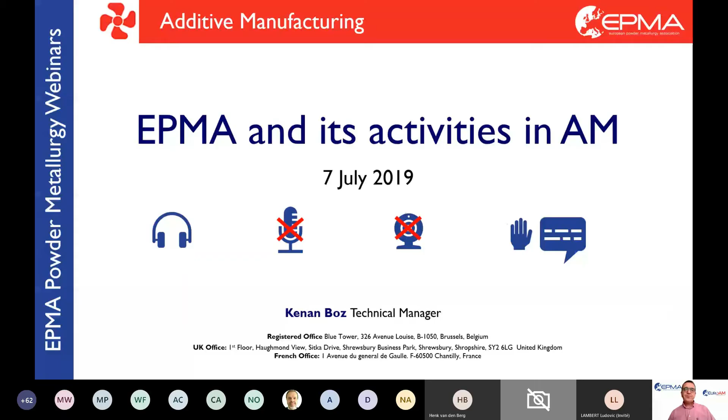Okay, so today's agenda is, as you can see on the screen, I will have a short presentation of EPMA and its activities. And then we have two speakers.

The first one is Claus Aumund-Kopp from Fraunhofer IFAM Bremen. He is the group leader of additive manufacturing in the institute, and also one of the chairs of our sectoral group of additive manufacturing, EuroAM. And then we have Walid Frika, who is the sales manager of Granutools from Belgium.

Granutools is, as you may know, a company specialized in measurements and metering in powder metallurgy.

So regarding EPMA, for the ones who have no idea what EPMA is, I will go step by step. EPMA is the European Powder Metallurgy Association. It is a non-profit association established in Brussels in 1989 with three key missions.

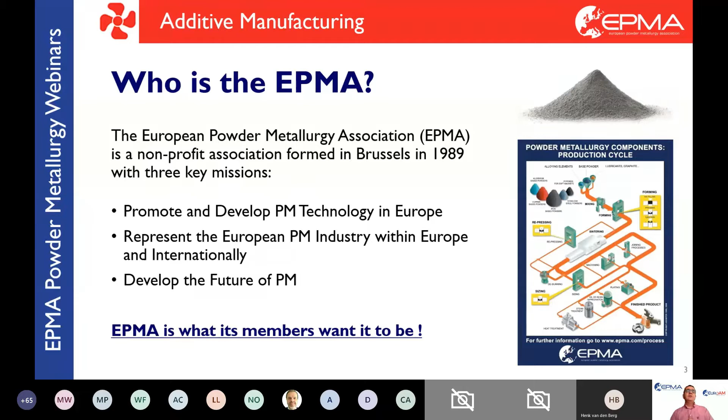The first one is promoting and developing PM technology in Europe and representing the PM industry in Europe, either internationally or around the Euro land, and developing the future of powder metallurgy. The best definition I would like to express is the one underlined below: EPMA is what its members want it to be.

Regarding the history of powder metallurgy, if we make a schematic explanation, we can consider it as a tree where the roots are our materials, that is the ferrous and non-ferrous alloys, the hard materials, tungsten carbide, together with cobalt interfaces. With all these materials, we build up our applications.

The very first and basic application of powder metallurgy is press and sinter. It is one of the main applications used in automotive steel. Then we have the second sectoral group, or application, which is hard materials, especially for cutting tools. And then we have metal injection molding. Step by step, new applications have evolved.

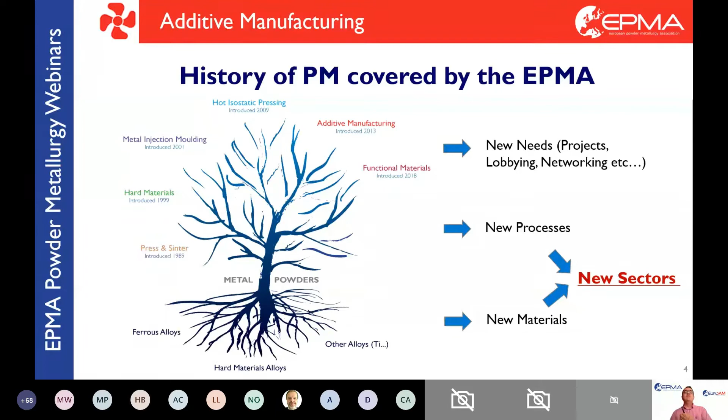EPMA has contracted new sectoral groups to represent these industries. As new needs evolve with new projects, lobbying and networking, and as new processes develop using some new materials, new sectors are born. So in the end, maybe we will have a seventh sectoral group within the next 5 or 6 years, we don't know.

Regarding the EPMA sectoral groups, as you can see, we have 6 sectoral groups. These sectoral groups have regular meetings to follow up the industry together with universities and academicians.

Also, we have the statistical service to collect data about powder metallurgy in Europe. And then we also have the benchmarking service to give an idea about the current situation and the future of the industry, together with the trend service and the benchmarking service.

And then, of course, we have the seminars, as you may already know, depending on each sectoral group, we organize seminars regularly. And we also have publications. As you can see, we have 4 booklets for additive manufacturing, hipping, MIM, and press and sinter.

We are working on the preparation of the booklets for HM and functional materials. I think by the end of the year, we will have the complete set of brochures for each of our sectoral groups.

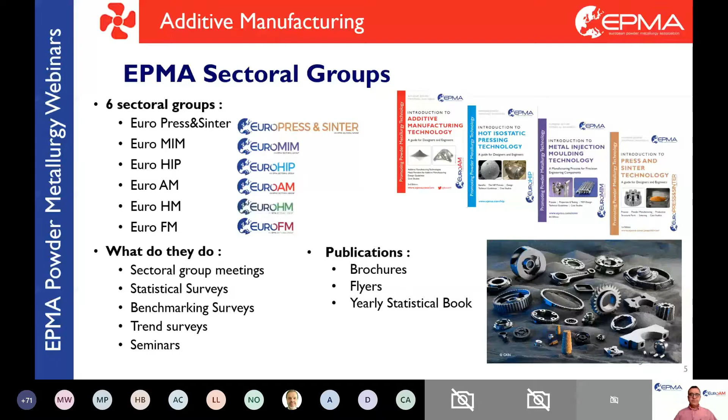So I also want to say some words about the working groups of EPMA. We have 2 main working groups: EHQS and EPMI.

EHQS is the working group of EPMA on environment, health, quality, and safety. It has three subgroups, as you can see on the screen. One is ISO and standardization. The other one is chemical management, about regulations and legislative issues. And also a subgroup on life cycle analysis.

EPMI is the European Powder Metallurgy Institute, what we call a kind of group of academicians coming together from research centers and universities, and they work on development of projects. They work on transfer of students or staff in between, and also they support EPMA with respect to education and research topics to promote powder metallurgy in the Euroland.

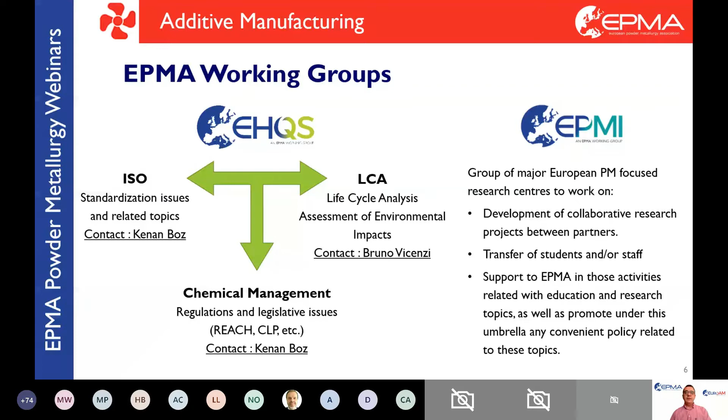For the EHQS working group, I would like to invite you to join our bi-monthly newsletter, follow up the issues related to powder metallurgy, as it looks like standardization and chemical management will be important topics for powder metallurgy within the next years.

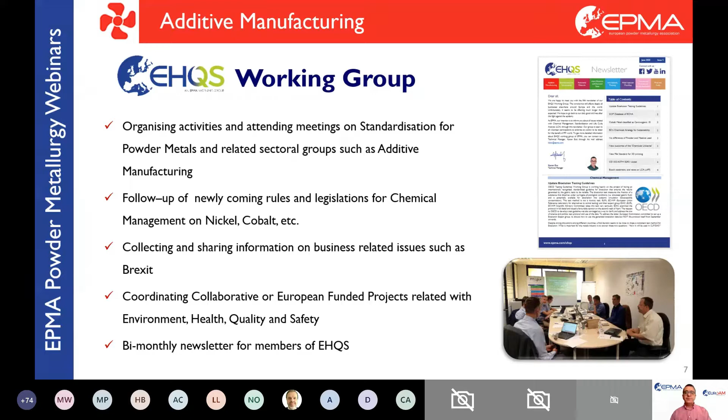So, regarding the European Additive Manufacturing Group, the EuroAM, as you have seen it on the tree, it was set up in May 2013, together with the companies and organizations in the supply chain who are members of EPMA.

It is one of the most active groups in EPMA. As EuroAM, we organize seminars regularly every year. For example, last year the seminar was in Gothenburg, Sweden. Unfortunately this year we had to postpone it to December. It was planned to be in Augsburg, Germany, together with Fraunhofer IGCV.

And also regarding the publication of our brochure on additive manufacturing, we announced the third edition of this booklet. It is one of the main handbooks of additive manufacturing. You can download it freely from our website.

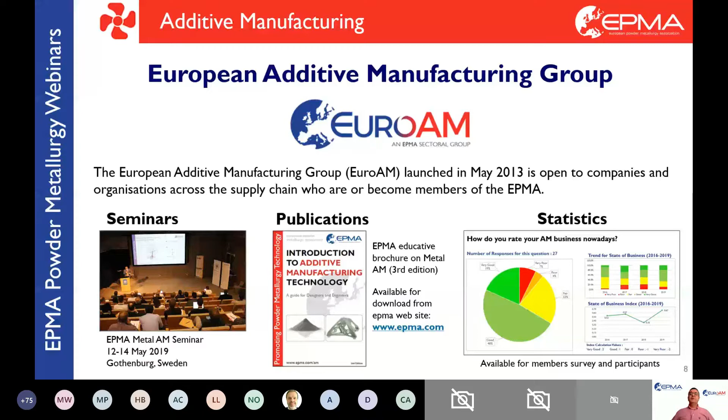And also regarding the statistics in AM, EPMA's statistics, especially the trend service, is one of the main statistics followed by the whole industry. But it is unfortunately available only to members and participants of the survey.

So I want to say some words about EPMA's club projects. The club projects are the projects coordinated by EPMA based on ideas coming from universities and R&D centers, or what we call the contractors. We announce these project ideas to the industry to find partners who will fund the project.

Up to now we have completed 28 club projects as EPMA, and we raised more than 1 million euros for these projects from the industry. Currently we have 6 projects running, and we will have 3 more projects to be started before the end of 2020.

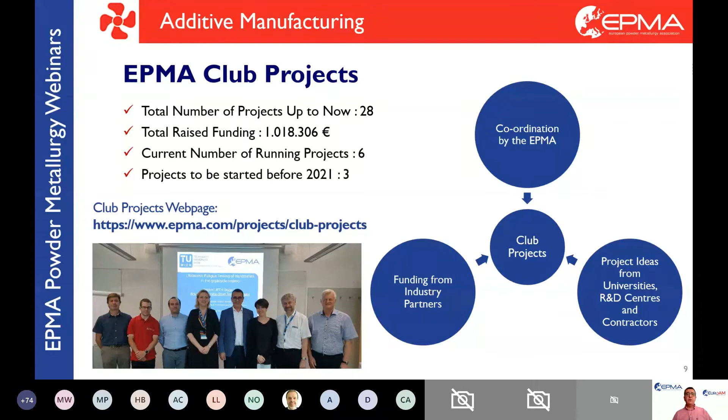The next thing I would like to mention is the EU-funded projects of EPMA. Up to now, EPMA has been participating in many different EU-funded projects, namely AM Motion, EFFIPRO, and the current running ones, especially Supreme and SAM. These are all projects within the scope of Horizon 2020 or Marie Curie training networks.

I want to say some words especially about... sorry, yeah, okay, I'm sorry.

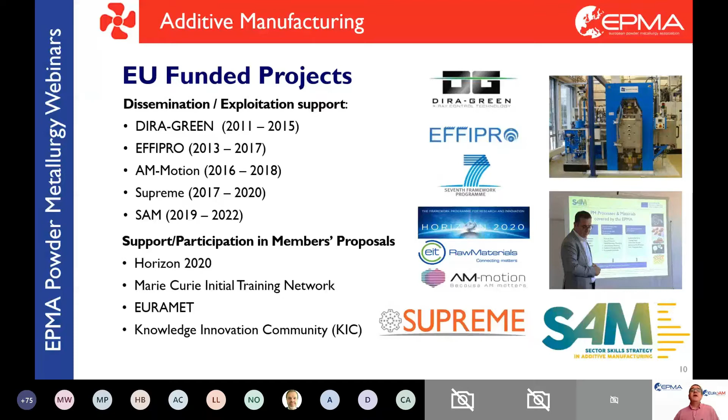Regarding the SAM projects, I want to mention our invitation to join its LinkedIn groups, especially for students, trainees, and job seekers in additive manufacturing. You're kindly invited to join SAM projects LinkedIn groups so you can make good use of networking within the European additive manufacturing industry.

The most important thing I would like to mention is the European Congress 2020. It will be held online this year due to COVID-19, for the first time in the history of EPMA. It will be a 3-day event with more than 150 presentations, so it will be a very tight program.

The technical program will include presentations on technical sessions, special interest seminars, and we will also have a plenary session where our president and our executive director will make good presentations on the industry itself, on powder metallurgy, and other issues. You can follow the event or register from the website europm2020.com.

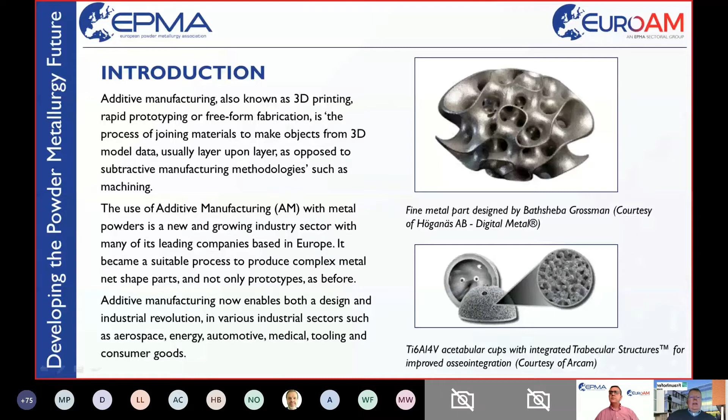AM has definitely special benefits. I already mentioned this increased freedom of design. You can build very lightweight structures like displayed here on the right. You can add additional functionality to your products like internal channels, which can hardly be cast or drilled into your products. You have less raw material consumption, sometimes up to 25 times less versus machining, if you mill away let's say 90% or even more of an aluminium block. This is not the case with AM.

You only use the material where you need it for your product itself or for certain support structures. You do not need tooling. You directly print from the 3D model. And in most cases, you have very short production cycle times and can even produce complex parts in a few days, and in many cases, much faster than with conventional machining.

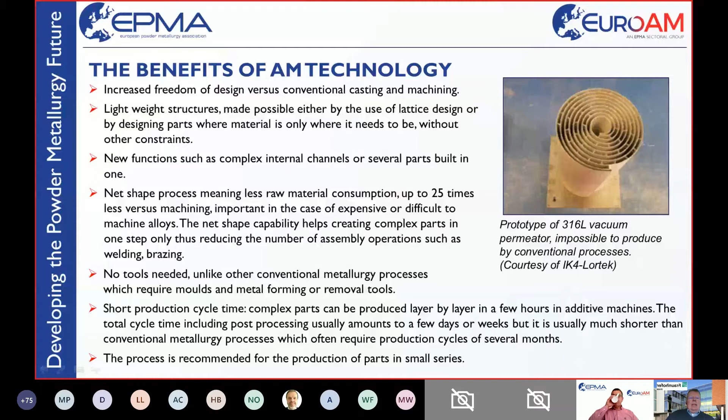Of course, as with every technology, there are limits, also with AM. One of the limits is the part size. At the moment, we are ending with a machine size of about 800 by 500 by 400 millimeters, which is one of the very big laser melting machines. A binder jetting machine of the same size is announced, but having such a machine does not always mean you can print these big parts. So you are definitely limited in part size.

Part design is also limited to some extent. If you think of support structures you need, especially with laser-based processes where you build on platforms, you have overhangs with some products which have to be supported, and things like these.

Concerning the size of production series, additive manufacturing is still seen as being limited to, let's say, lot sizes of here it says 25,000. We have seen products which are produced to 100,000 a year, but compared to mass production, AM is still limited to smaller lot sizes due to its flexibility. It doesn't make sense to produce mass products like screws or things like these.

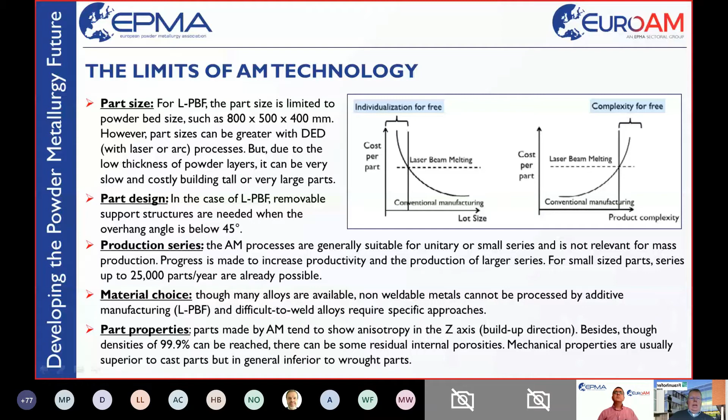So having an overview on the different processes mentioned before: powder bed fusion technologies like the laser bed or laser-based LPBF, which is laser powder bed fusion. This is also possible with an electron beam as an energy source - then it's electron beam powder bed fusion. And relatively new, having come back from 20 years ago, is the binder jetting approach, where a liquid binder is printed into the powder bed. Details will follow. And on the second branch, we are looking at the directed energy deposition, DED, processes, where we have energy sources like lasers, EBs, and arcs, and feedstocks like wire or powder. So this can be a general overview over the different processes.

Looking at the powder bed fusion systems, the most widespread processes are the laser beam powder bed fusion and electron beam powder bed fusion, which work more or less the same way. A powder layer is applied on a building platform, and then the laser or electron beam selectively melts the upper layer of the powder. This is also standardized in the according standard, where it's called an additive manufacturing process in which thermal energy selectively fuses regions of a powder bed. These melting processes are repeated layer by layer, and in this way, in most cases by lowering the platform, the 3D product is built up in the building chamber.

Going into a bit more detail concerning this process, a typical AM machine based on a laser as an energy source has a stationary laser gun, and the laser beam is then controlled by moving a mirror. So the whole surface of the building chamber or of the building platform is scanned by this laser beam, to the position where later on product volume shall come into existence.

The first machines had only one laser. Meanwhile, we have machines with double lasers and even with 4 lasers integrated into the system, simply to be able to scan larger building platforms and to speed up the production time.

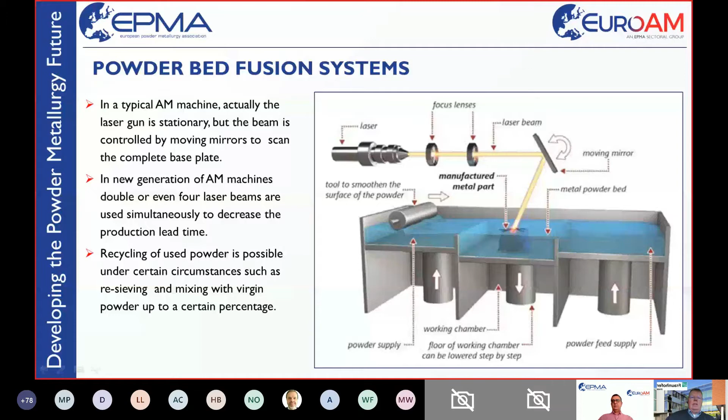Recycling, a very important aspect, is possible. Recycling of the used powder, not of the one being built into the product, but of the powder which is still surrounding the completed product in the end. This powder can be sieved and re-sieved, and in some cases mixed with virgin powder, and thus it can be reused for the next build job, at least to a certain percentage.

Another detail of the laser melting process: you see the beam scanning in this direction and melting the loose powder, and here it still says laser sintering. This is not the correct term, as it is not a sintering process, it's a melting process. By moving on in this direction, the beam melts the powder, and in the end you have a completed product. And the physics behind this is partly absorption, partly reflection, partly scattering.

So a very complex process in detail, but it's state of the art today. And we have laser powers between 200 watts and 1,000 watts, meanwhile being able to melt the metal powder and build up complete metallic products.

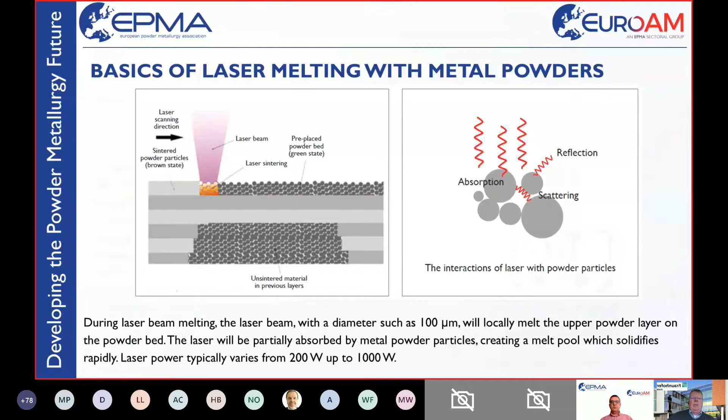Electron beam melting is a bit different. It takes place under vacuum. That's the first big difference, and it has an electron beam instead of a laser beam as an energy source. The laser process takes place under protective gas, mostly nitrogen or argon, depending on the material used. As said, EBM does the same in vacuum. It's necessary for the electron beam to be scannable in the end.

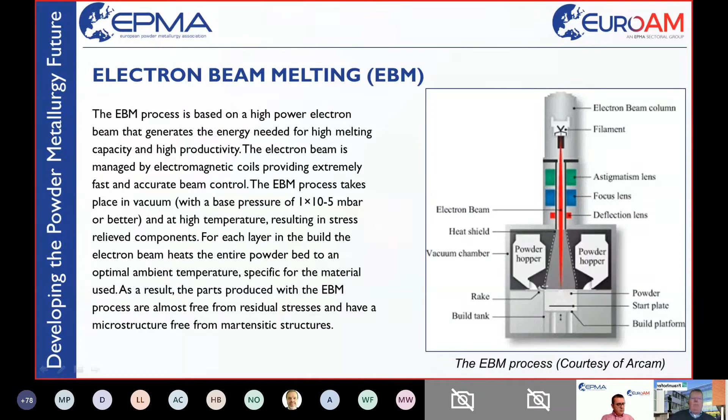Another special thing with EBM is that every powder layer is preheated before it's melted, and this preheating results in a hot process compared to laser melting. The big advantage of EBM, therefore, is that we have very, very low or almost freedom from residual stresses. Therefore, EBM is used for very special materials in the end, and has found its way into the market next to the laser beam variant of more or less the same powder bed based process.

A newcomer, or a revival, a renaissance, is allocated to the metal binder jetting plus sintering process, which has seen a renaissance from the late 1990s, where this technology had already come up, but nobody was interested in it due to the lack of the overall additive hype. Now it's back for some years already, and the metal binder jetting process is something completely different compared to the beam-based technologies.

There we do not have a beam melting powder, we simply have a printer printing a kind of binder. Here it's a liquid bonding agent in the standard, and this liquid bonding agent is selectively deposited to join powder materials. So no metal powder melted together, but in a first step bonded together.

It's also a powder bed based process. So you're preparing a powder layer, the print head comes and prints binder into the powder bed. Then you have a small drying of the binder in between, and then you repeat these steps. So powder layer, printing binder, drying, and then you end up with so-called green parts.

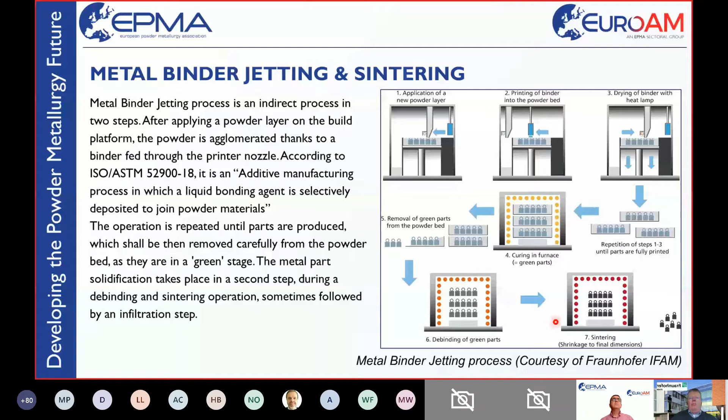Binder jetting is—sorry, Kenan, can you just tell me if I'm still—yes, we hear you, and the presentation on the screen, as far as I see. Yes, you can go on. Okay, that's fine, because I lost—yes, there was a small audio connection issue. A little cut on your voice, but now it's back. It's fine, you can go on. Okay, thank you.

So some facts about metal binder jetting plus the subsequent sintering step.

Metal binder jetting is assumed to be much faster than the powder bed fusion processes mentioned before. Costs are assumed to be lower. We do not have reliable figures yet, but we are on a way to establish binder jetting as one of the metal powder-based processes into industry.

And one of the biggest advantages of metal binder jetting compared to EBM and LBM, or powder bed fusion processes, is that you do not need supports, at least not during the printing step.

And the build box can be completely filled. And if you look at build box sizes of this size, 800 by 500 by 400 millimeters, you have much more volume during one print job to be filled.

That's at least assumed. Of course, you need two process steps, printing plus debinding and sintering, but for the powder bed fusion processes, mostly also thermal treatment is necessary after printing. You have green parts to be handled in the end. These green parts are brittle, so green part handling in between the two process steps is still a challenge to some extent.

You are a bit limited concerning the wall thicknesses. So if you want very thin walls, the beam-based technology, especially laser beam melting, might be a bit more advantageous compared to binder jetting.

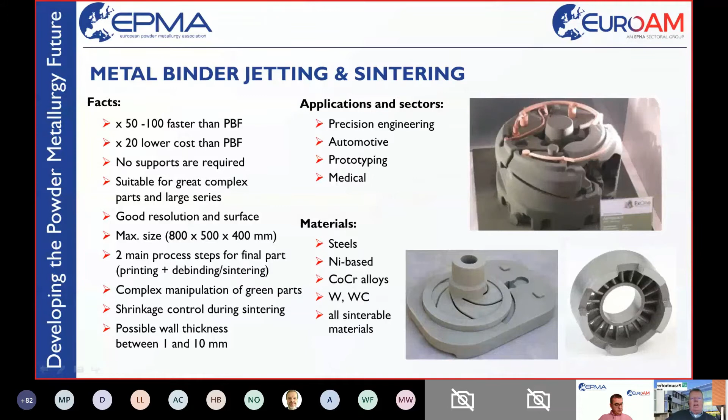Concerning the materials for binder jetting, we have all materials which can be sintered in the end. One exception today might be aluminum, which is still missing here for binder jetting, as sintering of aluminum is a very special thing and a science on its own. Only a very few companies are able to do that. So aluminum for binder jetting is not state of the art today.

Coming to the third process group, which is directed energy deposition. Some people say this is not a real AM process as it's not layer by layer, if you see it very strictly, but DED is part of the market, definitely, and powder is used for the process.

So you have a powder feed and a laser melting the powder, and then you have a welding process, a clear welding process. And if you use a 3 or 5 axis manipulating system, you can end up with very large and very complex structures.

A limit with DED is the production of very small, very fine lattice structures or internal channels. There, DED is definitely limited compared to the other processes mentioned before.

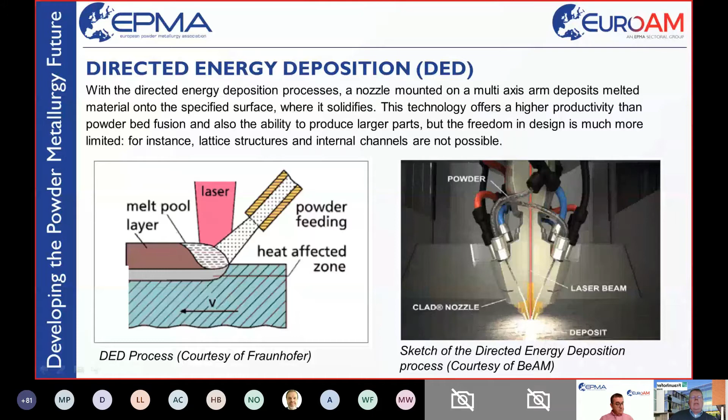If you look at the main process steps in AM, you have all the same with the different processes. You start with the 3D modeling. You take a 3D model, or a 3D scan, so a reverse engineered model, which is then transferred into the so-called stereolithography data, which has become the standard data for additive manufacturing. So STL data is triangulated surface data.

This data of the model is then prepared, so pre-processing for the printing step itself. Holes can be repaired, the surfaces can be turned, the part orientation is defined, so the positioning in the build chamber is defined, and then this model data is sliced, so cut into slices, so it can be printed layer by layer for most processes.

This data preparation step, meanwhile, is supported by lots of different software solutions, very sophisticated software supports. Support is the right keyword. This software, to some extent, allows an automated positioning of support structures for the beam-based processes, for example.

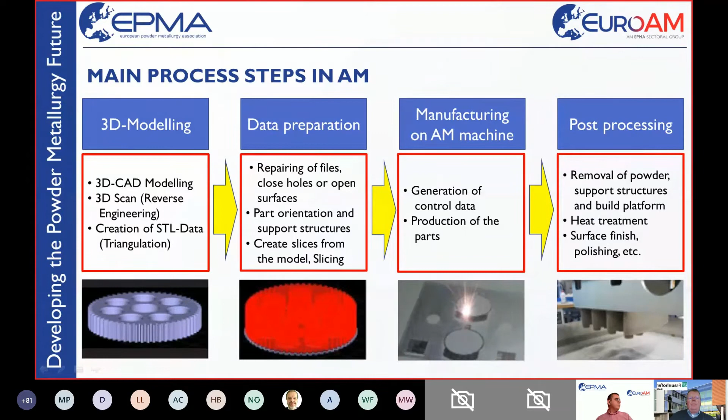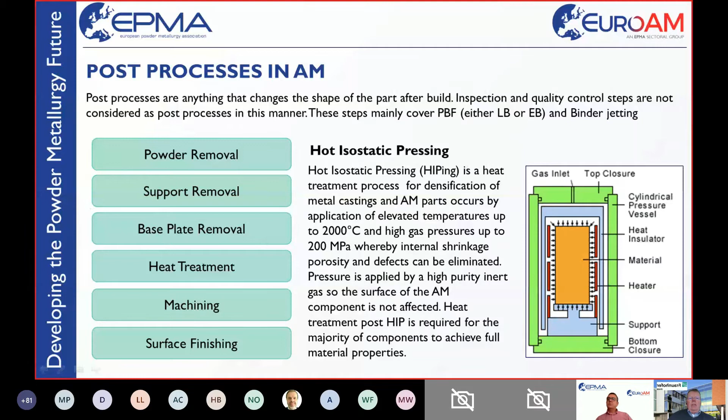Again, post-processing: powder removal, support, base plate, heat treatment, machining, surface, as said before. One special thing is hipping, which means hot isostatic pressing, which is still done with a lot of 3D printed products. As I mentioned at the very start of this presentation, we have in many processes a certain amount of statistically distributed closed porosity, and with closed porosity, hipping would be the right post-processing step to get rid of that. Open porosity at the surface can't be solved with hipping, of course, but hipping is used by very many manufacturers, therefore it's mentioned here.

Okay, one big topic concerning additive is always the keyword topology optimization. Topology optimization, well known by many of you, I think. There you have software which allocates material only where it's really necessary for the purpose of the part, mechanical loads or other things the part shall fulfill.

And these complex structures can be printed with most of the 3D printing processes. So topology optimization has become more reliable, or has become more common with 3D printing. So 3D printing has become a real enabler of topology optimized parts.

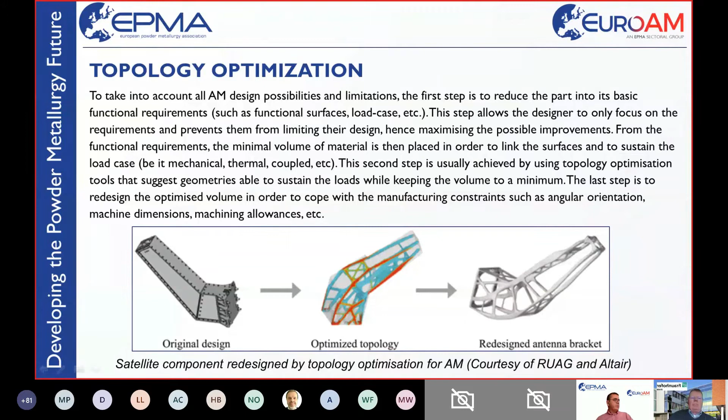Standardization in AM is one big challenge still. AM in general is a relatively new technology compared to, let's say, casting, which humans do for more than 5 or even 10,000 years now. So standards in AM are still needed.

A lot of standards are still needed, and standardization is a hard business, time consuming. Nobody pays for it, but a lot of colleagues are involved in standardization, even in AM. In the US, it's the F42 technical committee who does standardization for more than 10 years now, especially for AM. And meanwhile, we have an ISO committee, which is the TC 261.

So there is a lot of work ongoing, and it's not only ISO and ASTM. A lot of national standardization activities are ongoing. In Germany, I can talk for the VDI, the Association of German Engineers, who's come up with a lot of guidelines, which perhaps later on are transferred into standards and even international standards.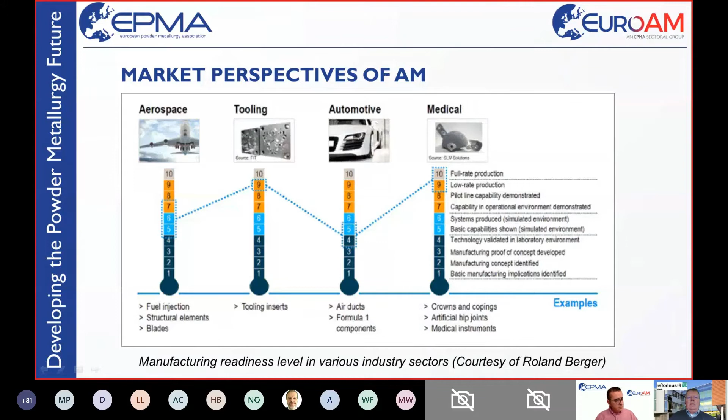And it's up to you and your companies to find the right products for 3D printing processes and applications, or use or take old products and integrate new functionalities. And this is the key word.

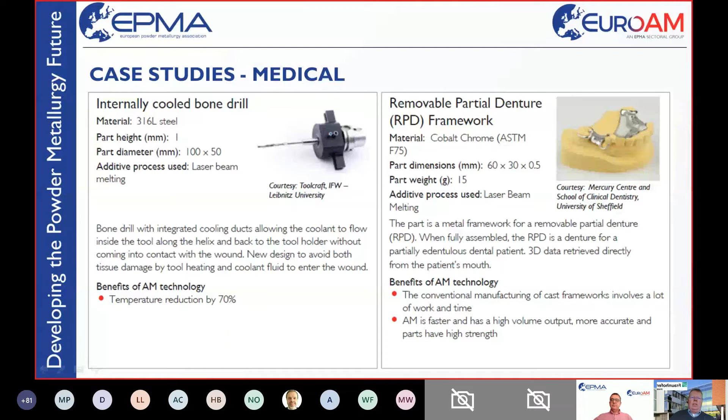Last but not least, we have this. We have a lot of case studies also in our brochure. Just some examples over here. So you can realize and design internally cooled bone drills, or drills in general. So internal channels is a big topic. You can use AM for processes which have been casting processes with a lot of process steps, and here the material was cobalt chrome. So dental industry has taken a deep insight into additive manufacturing, and many dental parts are 3D printed meanwhile.

We have things like complex tools with internal lattice structures, with internal cooling channels, very sophisticated designs where 20 parts have been converted into one printed part, for example. Brackets like these are topology optimized things. We've spoken about that.

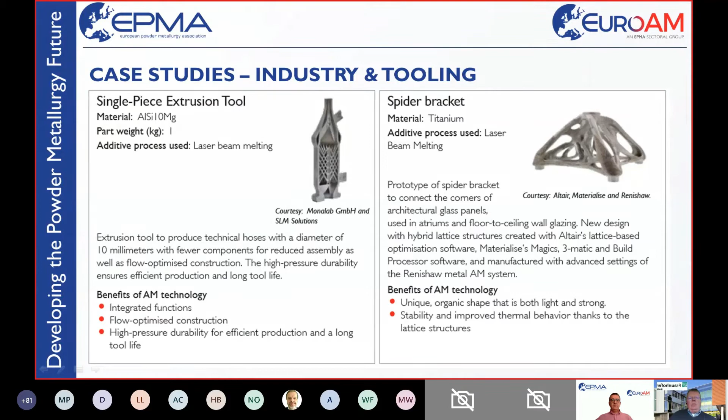So this was a fast and very basic overview on what AM is capable of. We have a lot of new possibility with these processes, and it's up to you to find the right product and to improve these processes. Thank you very much for your attention.

Kenan, it's up to you to introduce the next speaker. Thank you. Thank you very much, Klaus. This was really a nice and compact presentation to describe everything to beginners in AM, let's say. And that was our goal, actually, in this webinar.

Now, we will go somehow in depth with some technical details in our next presentation, where Walid will make a nice presentation about powder metallurgy, measurement tricks and issues like that in additive manufacturing.

So, Walid, are you online? Can you hear me? Yes, I am. Can you hear me too? Yes, I can hear you. Maybe you can share your screen.

Oh, yes. Now, as I said, Walid is from GranuTools. GranuTools is a company based in Belgium, mainly activities in measurement of powder flow and other details. Now the floor is yours, Walid. Have your presentation, and after then, I'm sure you will have a lot of questions depending on your presentation. Okay, thank you. Thank you for the introduction.

So, yeah, this presentation will focus mostly on powder characterization for additive manufacturing. And as said during the introduction, one of the challenges of additive manufacturing is the layers. So the goal is to understand how the powder will spread into layers.

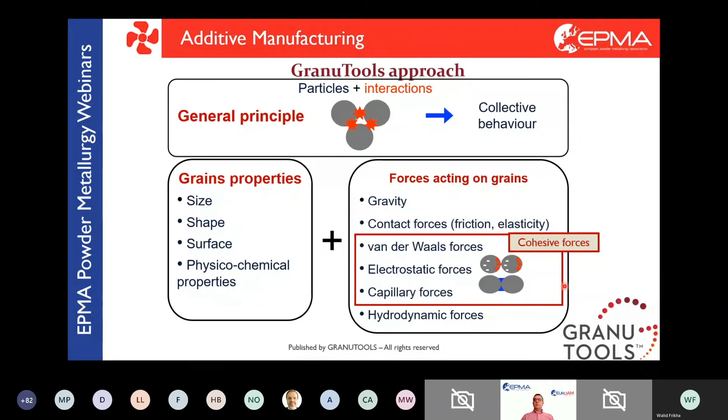The thing is, during the introduction, we told you that I work for GranuTools, which is an equipment manufacturer that produces several equipment, and the question I always get is, why do you have so many equipment to characterize the cohesive forces? This is the second principle about powder characterization.

The measurement device works as a proxy for the process condition. When you want to characterize a powder for a process, you need to understand what the process conditions are. Specifically, you need to understand the stress state, shown here on the y-axis, and the flow fields on the x-axis.

If I want to understand the powder behavior inside an industrial silo, I need to characterize the cohesive forces. But in the silo, we have very high stress states and very low flow fields. This means the powder is under a huge amount of stress and it's barely moving. So you need an instrument that will reproduce those process conditions, like a shear cell, for example, when you need to put pressure on the powder and move it very, very slowly.

Now, what we will focus on today is spreadability, and the spreadability is done with a 3D printer recoater. In the case of a 3D printer recoater, you need high flow fields because the goal is to recoat as fast as possible. The faster you recoat, the faster the piece will be printed, and to have almost no stress state, because the powder is at atmospheric pressure or even lower depending on the process. So the goal is to find an instrument that will mimic those process conditions.

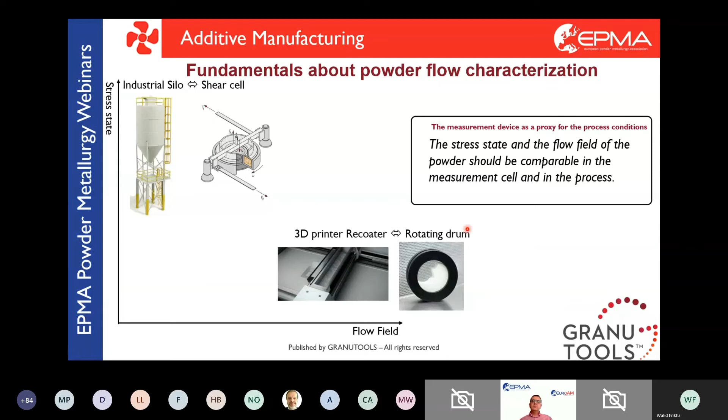And in our instrument at GranuTools, we are using the GranuDrum, a rotating drum principle to do this kind of measurement. So I will just spend a few minutes explaining what we are actually measuring with the rotating drum principle.

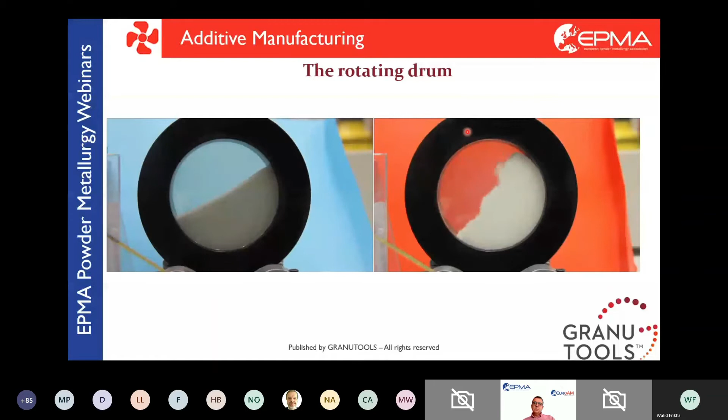We take a picture of the blue video every second for 30 seconds, so we have 30 pictures, and we compare those 30 pictures to each other. Then we do the same with the red video and see what is the deviation of the average angle. So I will just give you the final result directly.

So we can measure a cohesive index at each speed. I can tell you that for this powder, which is flour, the cohesive index at 2 RPM is 42.8. This is my value, and from experience, I can tell you 42.8 is not good. If you want to use a powder in an additive manufacturing process, you need to be between 10 and 20, depending on the geometry of your machine and your recoater. But yeah, between 10 and 20 is a good value.

Glass beads are under 10. Maize starch is above 80. So we have, let's say, a table of values depending on the material.

What we can see is that the cohesive index is a function of the rotating speed. If you measure the cohesive index at 2 RPM or at 20 RPM, you are not getting the same value, which is logical because the goal of the characterization is to comply with the process condition. Depending on the speed of your recoater, you will not gain the same spreadability. Depending on the speed of the rotating drum, you will not get the same cohesive index. This is very reassuring because we can tune the speed of the rotating drum to match the recoater speed and have a very close proxy to the process.

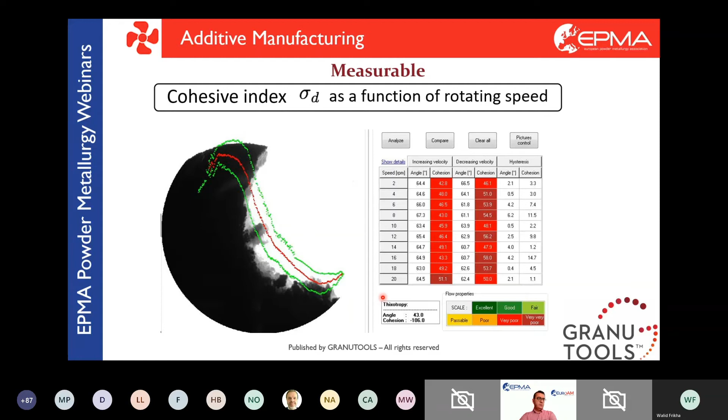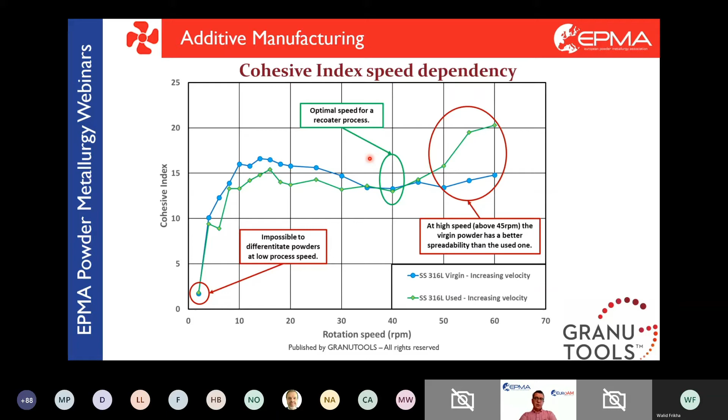So if you want to spread virgin powder and used powder seamlessly, you should work at a speed of about 40 RPM. For this, in GranuTools, we have a table that connects the recoater speed and the rotating speed, so you can find the approximate speed you should choose for this process, at least for this powder. This is how we do the measurement.

Now I will explain a little bit more with examples and more data, let's say scientific data.

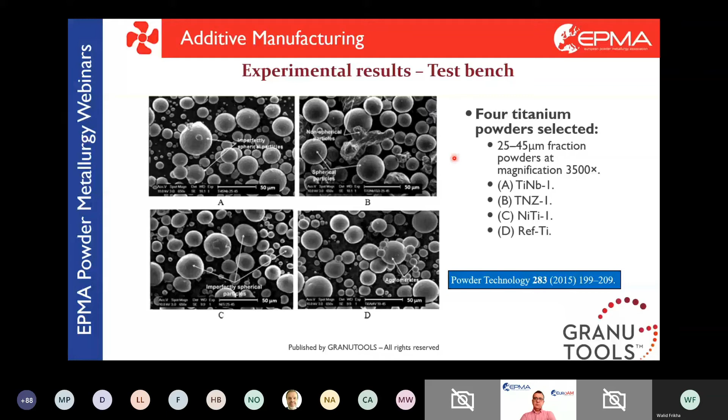So now I will focus on the rotating drum principle. I explained that the rotating drum can help us measure the cohesive index, which is measured with the temporal fluctuation of the powder interface, and that this will depend on the speed. So we chose 4 titanium powders used in the medical industry, used to print implants for people who break their skull or bones. We wanted to characterize the cohesive index on those powders.

This means every time you want to print a powder - I mean, here it's not a printer, it's a test bench - but every time you want to put a powder inside the test bench and know in advance if the powder layer will be homogeneous or will have irregularities, you can just use the GranuDrum. If the cohesive index is below 24, it will spread evenly. If it's above 24, you may have waves or minor irregularities. So this is what we call the pass-fail test. This is used for quality control. You can characterize your powder to understand what the homogeneous powder layer will be.

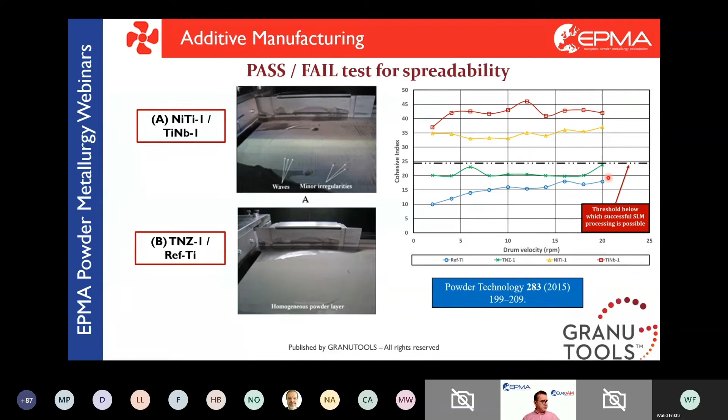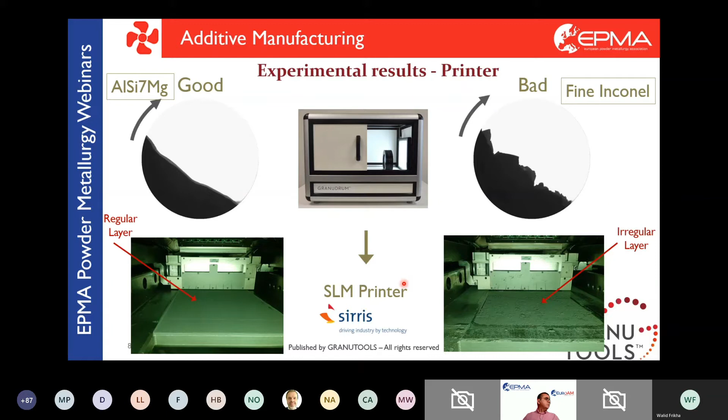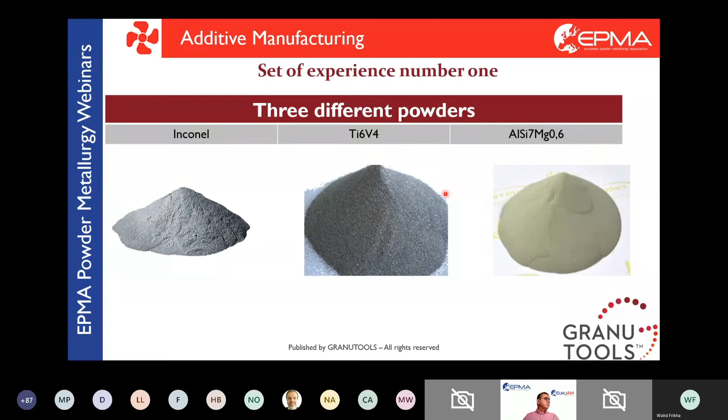So what we want is to improve this naked-eye system and create a way to assess the powder with a machine, and to compare the cohesive index and the powder bed irregularities with a machine. So we started a new set of experiments with 3 powders: I'm not sure it's an inconel, I think it's a scalmalloy, a titanium powder, and an aluminum alloy - so 3 different powders.

And what we do is, inside the printer, we take pictures from the top. We can see that at 30 millimeters per second, we have a quite regular powder layer. At 80 millimeters per second, we start to have small waves. And at 160 millimeters per second, we have irregularities and big waves.

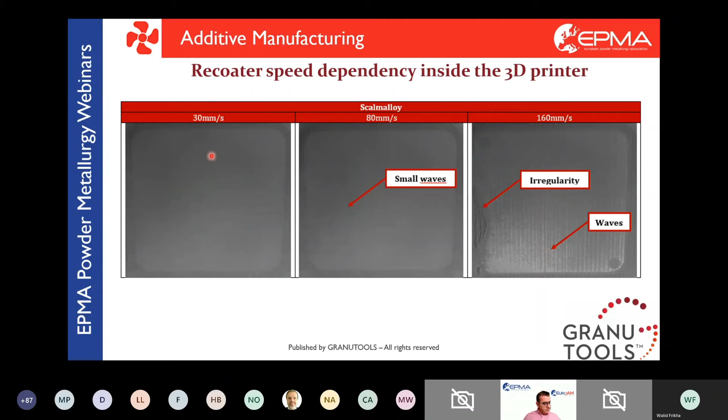So we put those 3 pictures inside a software that we call the granulator, which gives us the interface fluctuation of the powder. Do not pay attention to the layer numbers, it's not an important parameter. But what we can see is the interface fluctuation of the powder bed. For the scalmalloy, it's low at 30 millimeters per second, a bit higher at 80, and then it goes way higher at 160 millimeters per second. And what we get from that is a scientific sorting.

From that experiment, I can tell you that the titanium powder is the best one, followed by the aluminum alloy, followed by the scalmalloy. I can sort those powders and discard the powder very easily. So this was the goal.

But this interface fluctuation system is very complicated because you need to fill the printer with powder, recoat the powder, take a picture, and then measure the interface fluctuation. So the question is, if we do the test inside the rotating drum, which takes less than 15 minutes and only requires 50 milliliters of powder, will I get the same sorting?

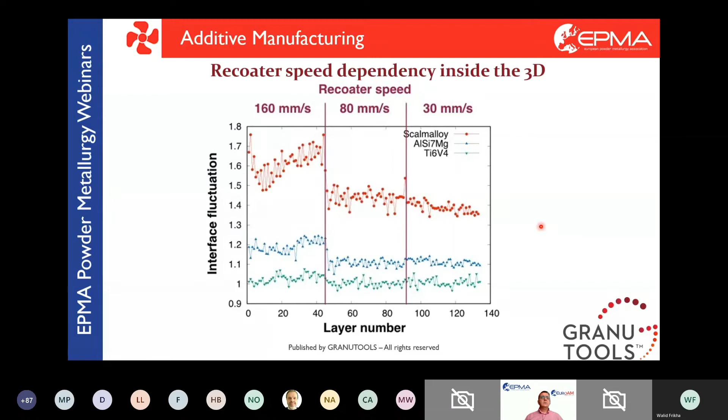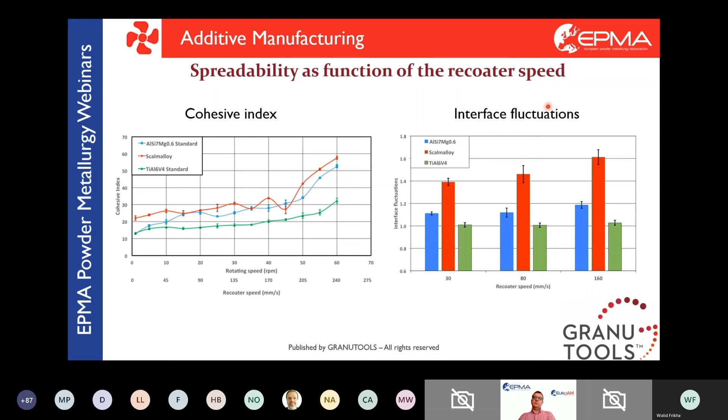So we wanted to understand: is characterizing the powder good enough, or should we also characterize the recoater? Does the recoater have a big influence on the powder characterization and on spreadability characterization more in general?

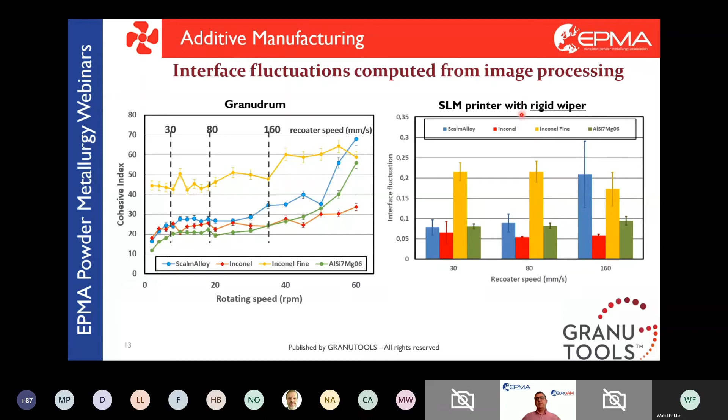So the question is, does the wiper have a big influence on spreadability? We know the powder has a big influence on spreadability, so we know we must characterize powder in order to predict spreadability. What about the wiper?

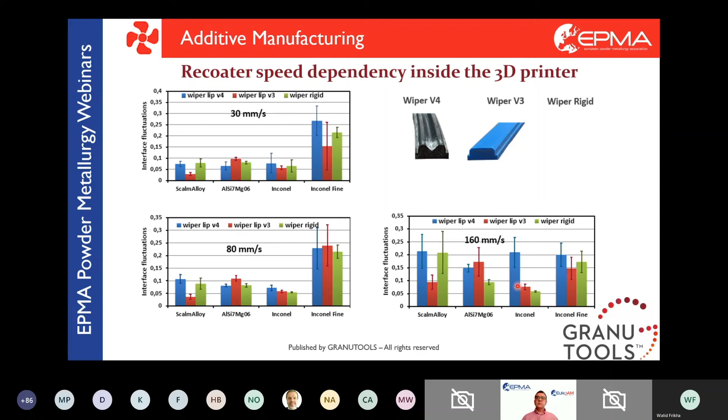So we turned to one of our partners that may have a solution for us, which is DCS Computing, that uses a code named Liggghts. So Liggghts is a simulation software for granular material.

And what we did is, since the geometry of the drum, the GranuDrum, is so simple, we can do a simulation of the powder inside the software. And what is good is that we can still follow the process condition, because we can take several pictures at 20 RPM, 60 RPM, and then do the same simulation inside the software, and set up some parameters for the model that will match the interface the best at the speed we want to work at.

Because, for example, if you want to calibrate your model with angle of repose, then you do a heap, you get the angle of repose, let's say 47. You set the parameters for your model, you get 47 as well, and that's it.

Your model is calibrated. But you can find several sets of parameters that will match this one angle of repose. When it comes to the test with the GranuDrum, since the goal is to match the interface as best as you can, there is only one set of parameters that will give you a perfect match, and this perfect match may be perfect at 20 RPM, but not at 60 RPM.

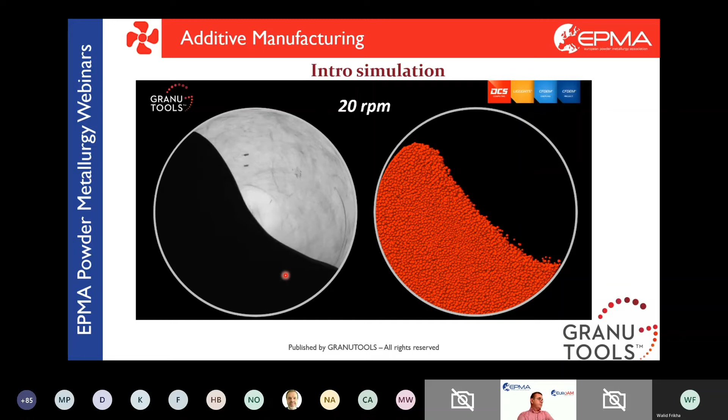And since the drum is a proxy to the recoating process, with the same process conditions, if you want to do a simulation on spreadability, you can, and you will get very good results. So this is what we did here.

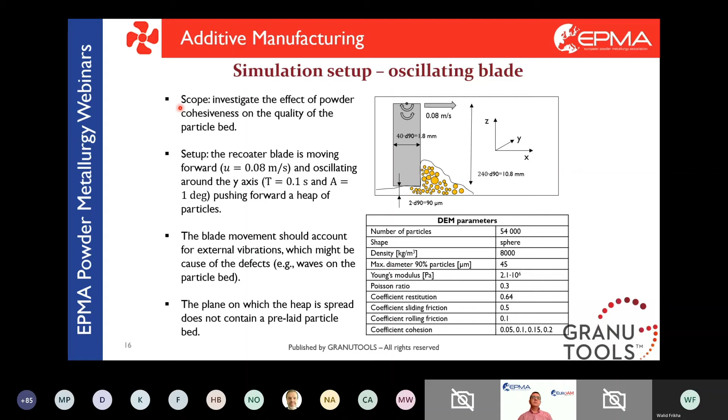So this is not a webinar about simulation, so I will not spend too much time on this slide. Here you have all the DEM parameters that we chose for the simulation. You have all the setup that we decided to put, and then we run the simulation, and we can see that we can assess spreadability with a simulation.

So this is how we can, with the GranuDrum, calibrate a model, and then use this model for simulation. And in the simulation, you can test all the shapes of recoater that you want, because it's only one shape to change. Then you run the simulation again, and you have your data, and you know what will spread well and what will not spread so well.

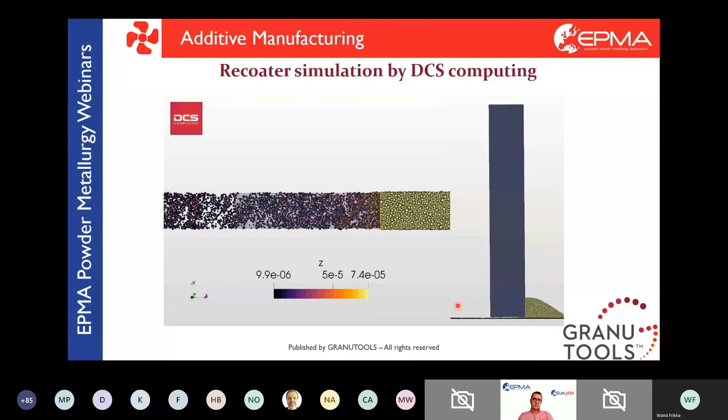So I've been talking for 27 minutes, so I'll give you a brief conclusion. The conclusion is that cohesion drives spreadability. The amount of forces making the grain stick together will get in the way of spreadability. If the powder is very sticky, it will not spread well and will have high cohesion. If the powder is non-sticky, it will have low cohesion and will spread very well. This is what I tried to demonstrate to you today.

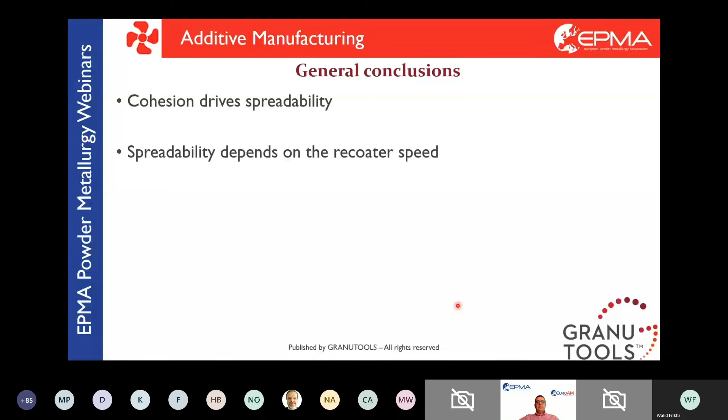Spreadability depends on the recoater speed. Depending on the speed you choose, you will not spread in the same way. Some powders have shear thinning behavior, some have shear thickening behavior, and you can assess that with the rotating drum test. So a good way to assess the optimal speed range for a given material is to run the rotating drum test.

With the rotating drum test, you can define at which speed you should recoat this powder, whether it's going to recoat well or not. Or if I'm doing R&D, I can create several batches of new powder and compare them directly in the GranuDrum to know in advance which one will spread better.

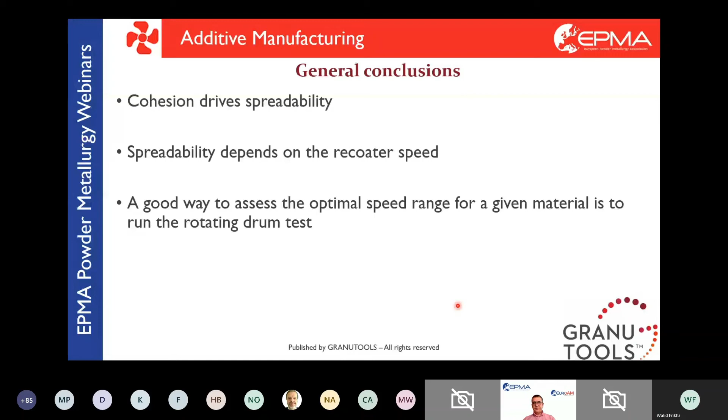So this is the end of my presentation. I'll just give you two more slides about how we can go further. A topic that was addressed before is binder jetting.

In binder jetting, one of the challenges is to control the binder. We don't want the binder to go through all the layers, but we do want the binder to go through the first layer at least. So we need to have a powder bed that is dense but not too dense. One way to characterize the density of the powder bed is the GranuPack, which is also one of our instruments that measures the compaction dynamics.

This is the number of taps - we are doing tap density, and we measure the compaction dynamics of the powder. If we get a powder that compacts very, very slowly, it's a powder that is very stable and you can control the density of the powder bed. If the powder is compacting very quickly, very vertically, then the powder may be too dense, because just the vibration of the machine, for example, will make the powder bed compacted.